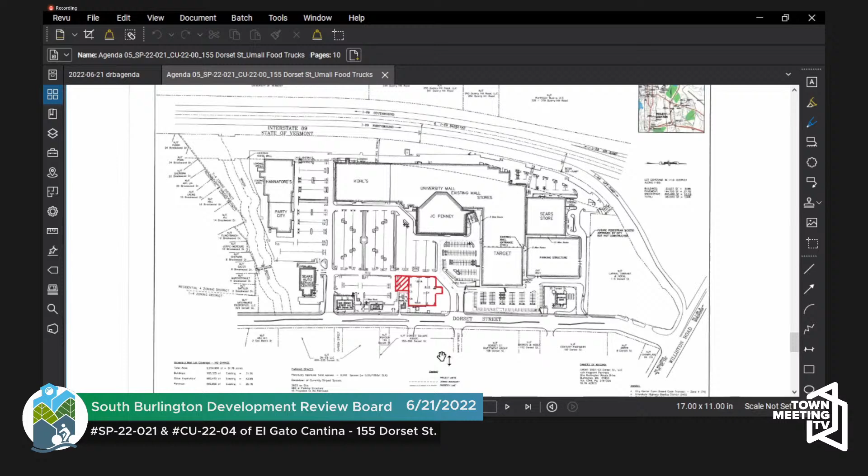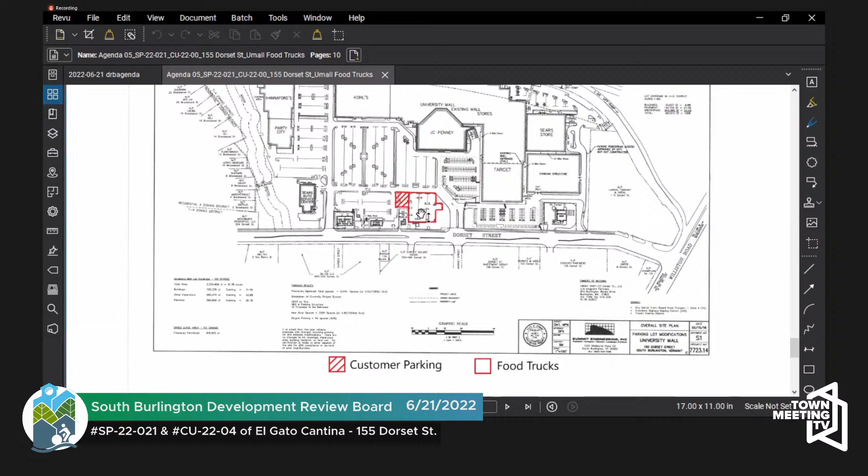Yeah, can you, or Delilah, whoever's running it, zoom in a little bit? Can you talk a little bit about how the food trucks are going to be configured? Are they going to go around like the edge so people gather in the middle? Right, so the food truck goes right where you have your mouse right now, on the other side. That's where the trucks will line up, and there are two parking lot mall light posts there, those little black things with lights.

I don't think the Christmas lights are going to do much, but the trucks will generally be around the perimeter. We'll put that condition in there - just keep an eye on it, don't overdo it, and get by with a minimum of what you need for safe operation. You don't want the lighting to become a nuisance or cause heavy glare for people driving by. Board members, any questions?

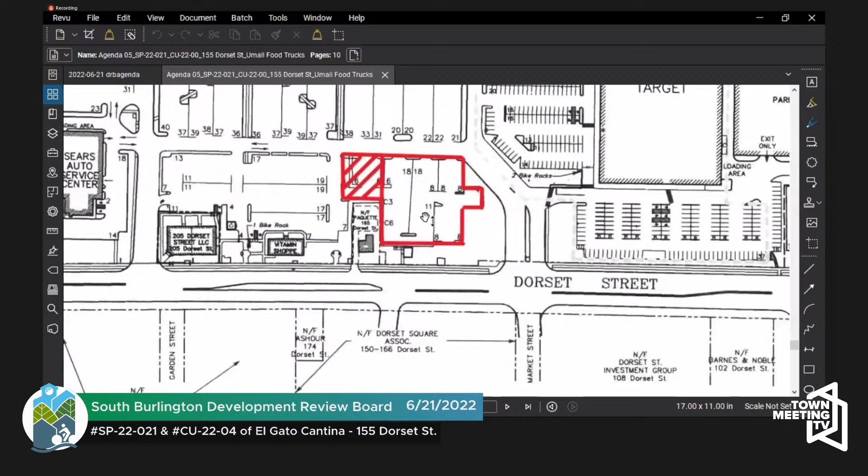Quick question - do the food trucks themselves have any lights for illumination around the area? Typically, yes, they do. They have lights by the service windows.

This is for conditional use, so will it be a seasonal permit, or is it approved in perpetuity if we approve it? The way it works is they get a conditional use approval from the board, and they're able to operate April through October. Then every year thereafter, they only need to come in and get a zoning permit to re-up it. With that, every year the zoning administrator checks in with PD and the fire department, and reviews our records for any complaints before the permit's issued. As long as they consistently get a zoning permit every year, they can continue the use April through October each subsequent year.

Do our regs have any limit on the number of trucks that can be there? We've shown the area of operation - this becomes part of the record, right? Yep, and there's a maximum of 16 seats, so as many trucks as they want to fit with a maximum of 16 seats. I think it'd be somewhat self-limiting.

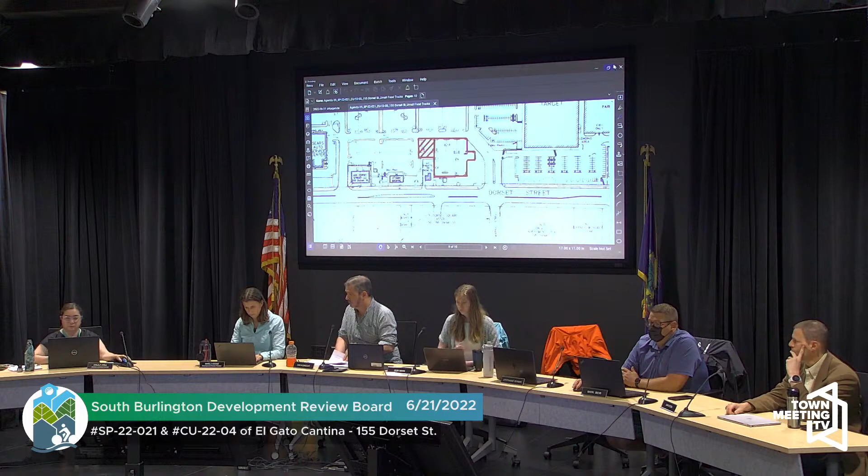Do we have anybody in the room here to testify other than the applicants? Anybody online? We'll close the hearing on this and then do a decision later, unless they have questions.

Do you guys have any more questions for us? We don't. Okay, so she'll take the conditions document here, add the part about the lighting, and then we'll issue a decision in the next few weeks.

I'll make a motion that we close site plan application SP 22021 and conditional use application CU 2204 for El Gato Cantina. I'll second the motion. Motion has been made and seconded. All those in favor of the motion, say aye. Aye. Passes 4-0. Thanks a lot, guys.

Thank you. All right, next item. Continued - ooh, we're ahead of schedule. Yep, 14 minutes ahead. That doesn't mean you guys get extra time.

We did clarify, just because it's on the agenda as 7:30, we're not in violation of open meeting law because we warned it for 7. The times didn't go on until we published the final agenda. Oh, that's pretty crafty. Yep, that's us, crafty. Whatever makes it move faster. Yeah, because we weren't going to be sitting here for 14 minutes not talking. That's right, exactly, okay.

Continued final plat application SD 2205, O'Brien Farm Road LLC, for the next phase of a previously approved master plan for up to 490 dwelling units and non-residential space as allowable in the zoning district. The phase consists of two 5-story multifamily residential buildings on lots 13 and 15, with a total of 251 dwelling units, 1,219 square feet of commercial space, and associated site improvements at 255 Kennedy Drive.

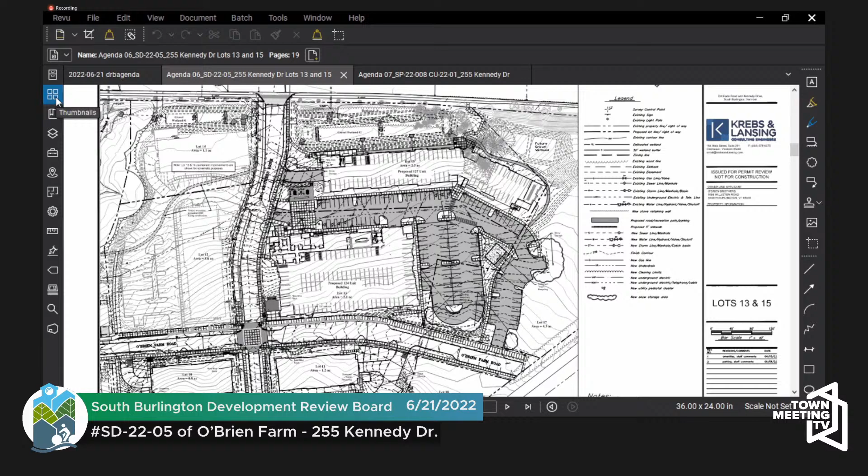All right, number 1, regarding PUD standards and 15.18.3 around access, circulation, and traffic management. Staff supports BFJ's recommendation, the outside consultant who reviews this, to include a condition requiring the signal be activated when 85% of the units approved for lots 10, 11, 13, and 15 reach occupancy. 85% of the total units would be 294 units, meaning the signal will be activated at occupancy of either the 3rd or 4th buildings. Staff recommends the board consider including a condition that the signal be activated at occupancy of the building containing the 294th unit in Hillside Phase 2, or sooner if warranted and demonstrated by a traffic study. Do you guys have any thoughts on that?

It seems in line with what we had proposed, so I think it works fine. We're planning on putting the signal in with building 13 and 15, so it sounds like it'll be activated before the 4th building is occupied. So that works for us. Okay great. Staff, any other further? Okay with you? Is that okay?

Do I have permission to go off script a little bit? You always, yes, whatever makes you question happy. Because you have approval for lots 10 and 11, right now what's your best guess in terms of timing of when 13, 15, 10, and 11 relate to one another? I think there's a lot in flux right now, and we get into that a little bit with the phasing request. Site logistics are challenging when we're talking the number of units that would all be constructed at once in 4 buildings. So it could be 2 years, it could be 3 years, and I think that's part of the phasing request.

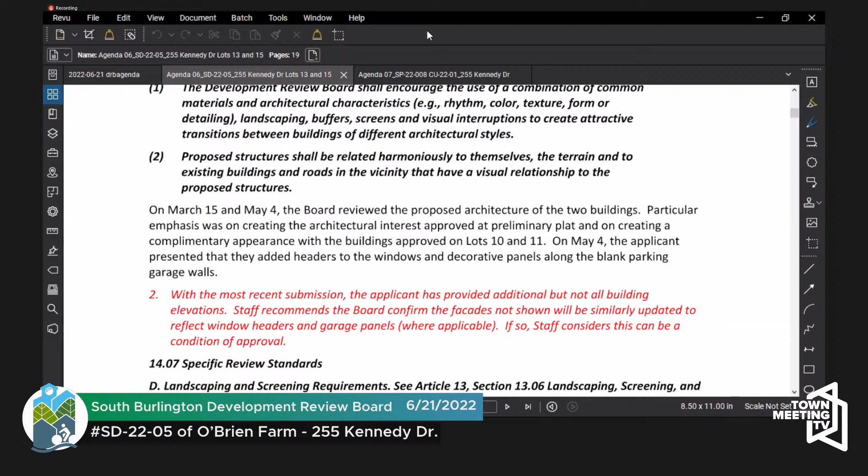Okay, move on to number 2 regarding elevations and architecture. So we've discussed in previous meetings the elevations of the building there. With the most recent submission, the applicant has provided additional but not all building elevations. Staff recommends the board confirm the facades not shown will be similarly updated to reflect window headers and garage panels where applicable. If so, staff considers this can be a condition of approval.

Where are you guys at on adding the extra? Yeah, so I think I read the comment, and we definitely can adapt all the elevations with the headers and the other details. I think the reason we did these 2 was because they were the only 2 we were proposing the garage level paneling on, because we wanted to get that out there. So certainly a condition of approval to update all the elevations to have the headers and all those details is fine.

All right, board members. Okay, great. Thanks. Moving right along, number 3 regarding landscaping and screening requirements.

So we talked quite a bit on the landscaping value and was it adequate? Is it meeting the minimum landscaping value? So the staff comment notes, excuse me, this was the finding of SD 2125.

The board finds the applicant may in the future be allowed credit for the remaining streetscape elements towards the required minimum landscaping budget on lots 12 to 15, as long as the objectives are otherwise met. The above elements are not typically required for streets, however the applicants propose these elements in support of their objective of creating a pedestrian-oriented development, which the board supports in exchange for reduced setbacks and increased heights. These values include only the incremental cost over standard features.

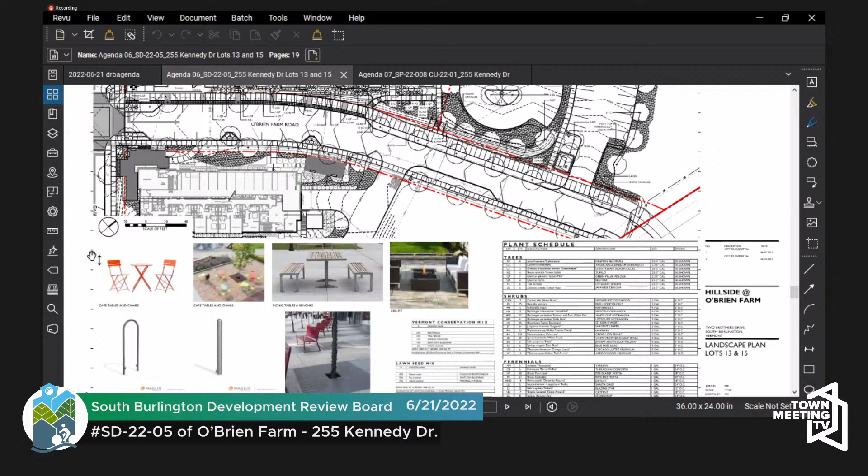The tree grate happens in the corner, just above the top of the page. If you scroll down a little bit, right? It's in that area, on the patio, I believe. Yeah.

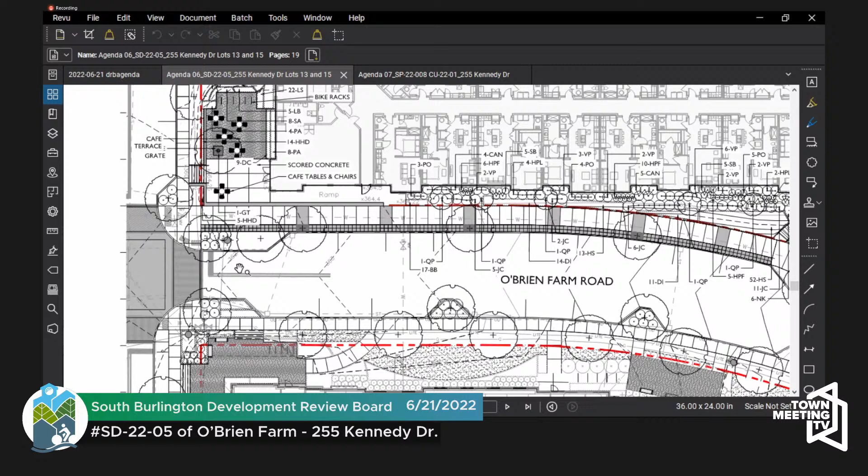There's trees and shrubs, perennials and grasses, and then the big discussion was about whether colored concrete and concrete pavers should be allowed. What they proposed is to include only the cost over the cost of standard concrete.

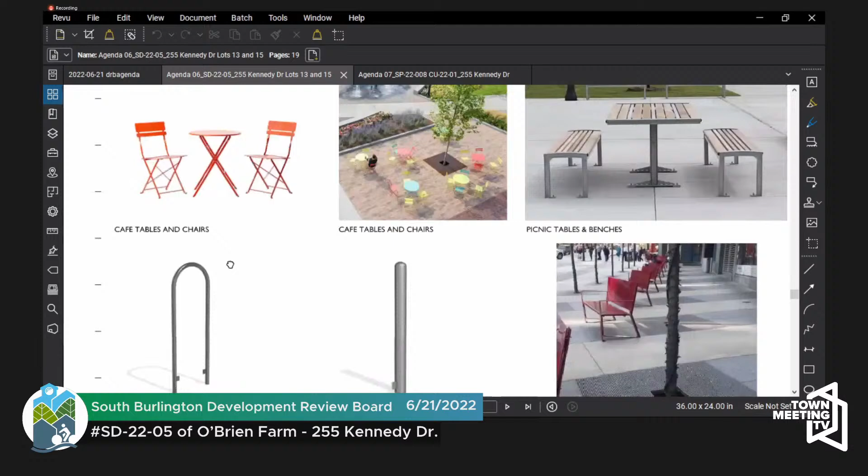We updated the budget after the last meeting to include the cost above standard concrete, like we discussed. I think we increased some tree sizes because that was requested. We made those changes and updated all the unit pricing to current market price for the trees.

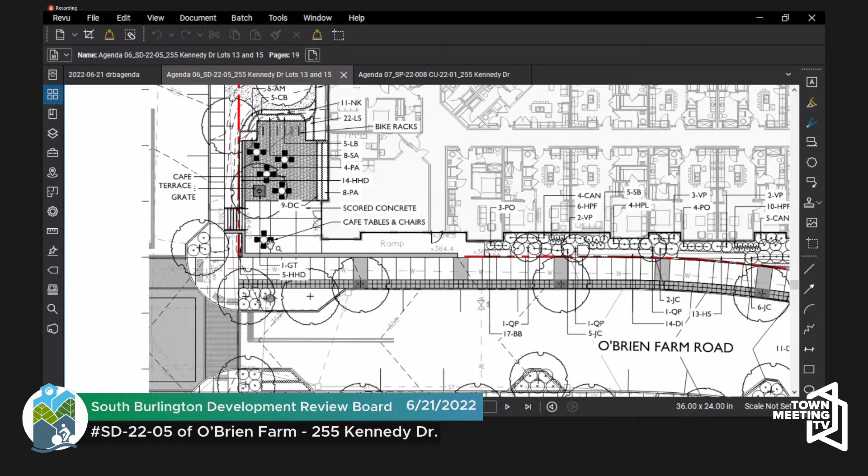We resubmitted the budget. I think this was my error on the bollards and bikes. One of the previous staff reports had a comment in the landscaping that said, with the exception of bike racks and bollards, these are non-permanent elements that are typically... and I read it and thought, oh, that means with the exception we can count those. But the rest of the sentence indicated they weren't typically counted.

So we had put them in because of that. If you guys are taking them out, it seems fine, and there's still enough budget in the previously approved permit to cover that deficit. So we would just increase the amount of that $140,000 being used to make up the difference, and pull those items out of the landscape budget, but still leave them in the project.

Board members? So I'm understanding that even once we take the bollards and bike racks out, the deficit is still more than adequate to make up the overage on the previous? The other way around, but yes—the overage on the previous is more than enough to make up the deficit on this one. I'm in agreement with it, and I affirm it because clearly the streetscape and these elements are all contributing to the success of this project. So I'm in support of this.

I'm curious about something for the record. How does our fire chief or somebody approve the location of the fire pits relative to a building or under a tree? You can't put it under a tree. The fire chief's position on fire pits is as long as they're 10 feet away from a structure, then you're fine.

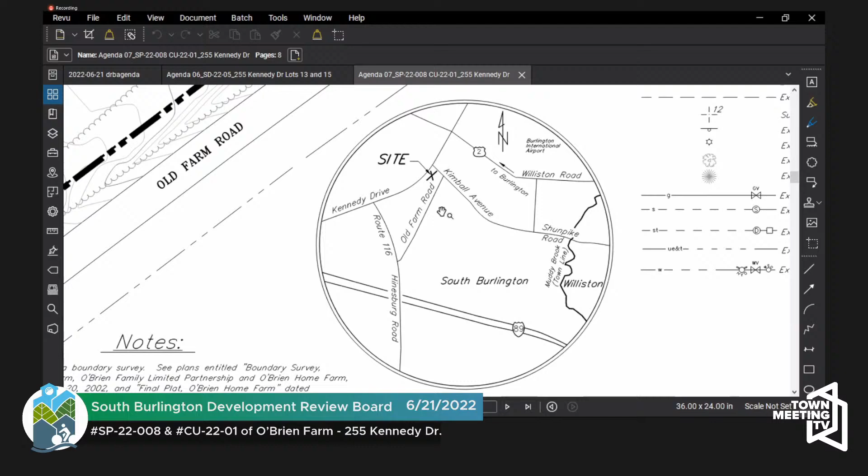We have a short little memo here. This is the parking that's associated with the lot 13-15 development. It's located on a different lot for purposes outlined in the project, essentially keeping the master plan borders intact and not expanding it to include more land. So we're putting the parking on a different lot. That lot is included in the adjacent master plan we've been working on with you guys. Everything seemed to be in order.

There was a bunch of discussion at the last hearing about the parking lot islands and whether to view it holistically or singularly. I think we settled that all out. There was a zoning line issue and some parking spaces that were in the wrong zoning district, in the R12 district, when parking is not an allowed use there. We did bring in the GIS zoning line, which we didn't have in the plans previously, and that made the situation much better, thankfully, not worse. It cleaned up the few spaces where the line was kind of half in the spaces. Those are all clearly in the C1LR now, and the 4 spaces we were discussing, we moved to an alternate location. So that's all cleaned up as well.

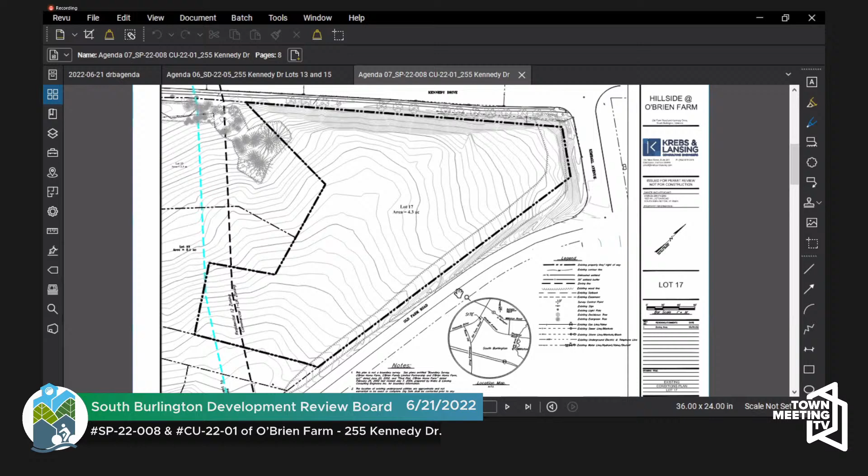Delilah, is there a plan that shows a little more where the parking actually is on the lot? The next sheet, I think. Just the next. Next shot. Okay, thanks, just so people can see it here.

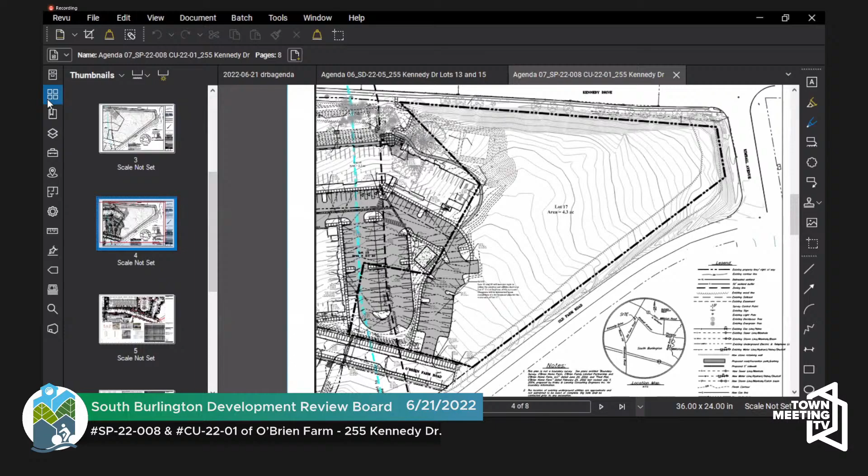Perfect. So the blue line there is the adjusted zoning district boundary, and before that, it cut off a few of the parking spaces in the island parking. Before that, there was parking where that triangle of the blue and black heavy line are, right to the left of the blue line, where that black line angled through, we took out. Yeah, previously the blue line was over in the middle spaces, and we talked about doing compact spaces or shifting the whole island over. We ended up not needing to do that because when we pulled in the GIS line, it was much more accurate and it all worked out. It's nice when that happens. Thankfully it didn't go the other way, that would have been a much bigger problem. Great.

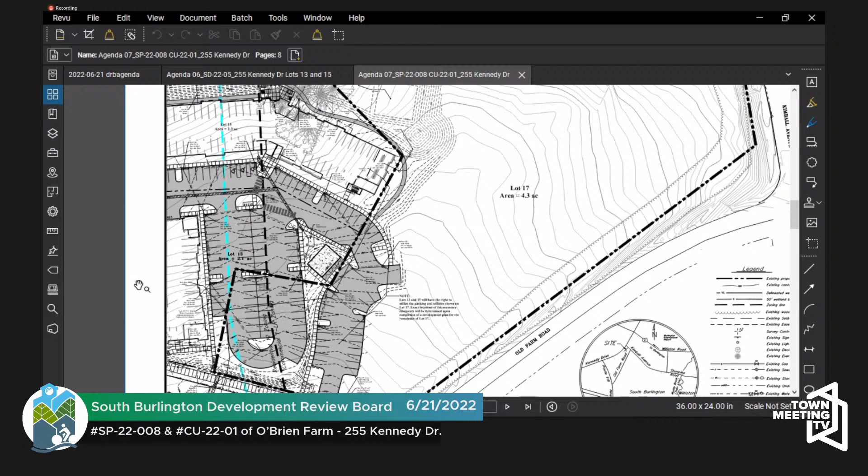Board members, any further questions on this item? No, I think that was the only open item from the last hearing. Staff, you satisfied? Yep. Any members of the public on this item to testify? Any members online or members of the public online?

Chair would entertain a motion on this one. I make a motion we close SP 22008 and conditional use CU 2201, 255 Kennedy Drive, 4.3 acre lot site plan and conditional use application. Motion's been made and seconded. All those in favor of the motion say aye. Aye. Motion carries 5-0. Thanks, guys. Thank you. Good luck.

Next item, site plan application SP-22-2004, Beta Air LLC, for a portion of the next phase of a previously approved 40.43 acre master plan for a 344,000 square foot manufacturing and office building, a 37,800 square foot office and retail building, a 15,600 square foot commercial building, and an 85,000 square foot flight instruction and airport use building. The project consists of a 24,000 square foot hangar, which represents a portion of the 85,000 square foot flight instruction and airport use building, at 430 Da Vinci Drive.

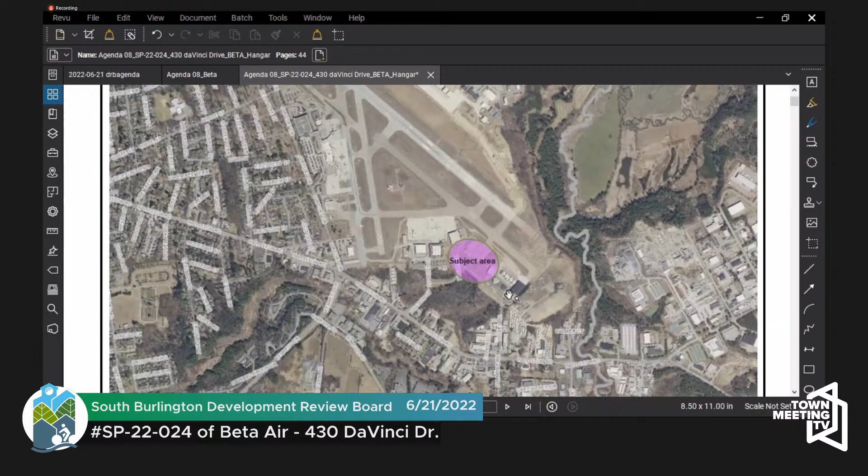All right, go ahead, guys. Well, you did a fantastic job in your summary there. We'll try to add a little color to that. This is the second project in the master plan that was previously approved. The first project was the assembly facility. This is the general aviation hangar, which is the first part of a multi-phase project that sits around the Valley West apron. For those that Googled it, there are usually some Air Guard planes parked there for a frame of reference. So we're excited to move forward on this project. As mentioned, this is part of our cultural center, part of our training facility, and we look forward to adding this building and this project to the campus.

Okay, all right, I'm going to dive into the staff comments. First one. It's on. Where's that, middle of page? Page number here, I can't see the color. It's page, must be page 3. Yes, page 3, okay.

So the connection between the project area and the portion of Valley Road to remain in the blue phase shall be removed no later than the red phase. Right now we're looking at the subject heading here, master plan conditions. These are conditions in the master plan that apply to all projects within the master plan area. So one of the conditions was that the connection between Valley Road and the project be removed no later than the red phase. And so that's the context.

Sorry, and you feel it's not relevant because of this condition? Okay, right, because we'll only get to it later. Gotcha. All right, so we can remove it. We want to just be sure that everybody concurs with the staff. Concur? Yep, okay, all right. Thanks. Applicant, is that okay with you? It is, thank you. All right, thanks, next item is middle of page, top of page 6.

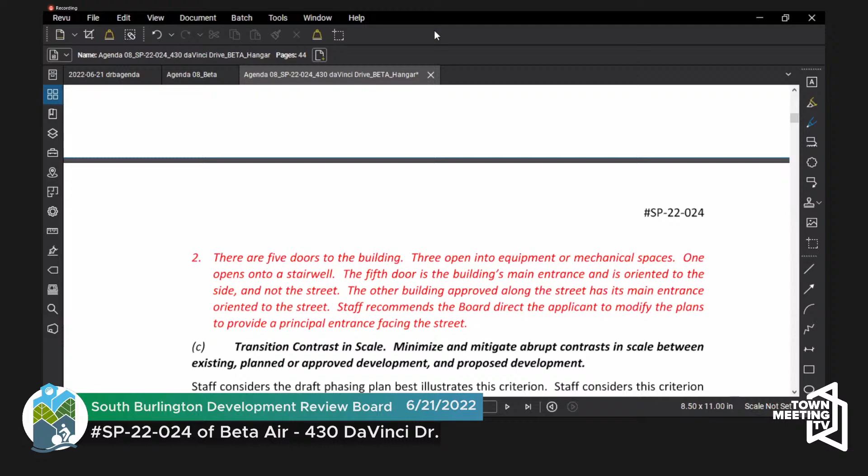Applicants? Appreciate the comment. As we discussed, this is the first phase of a multi-phase project. The main entrance, the cultural center, which will be built as part of the second phase, is where that street-facing entrance would be. The hangar itself is a service building. The entrance is off to the side, although because it's an odd configuration—not quite a corner lot, but maybe a corner lot—you could make the argument that it is on the street-facing side if you chose Eagle Drive as the orientation.

In 14.06, it doesn't actually require the door to be on the front of the street. It just requires that there is a clear pathway from the street to the entranceway, which we feel the landscape plan articulates really well, showing how all those spaces come together for the public. We would ask that the DRB approve the plan as submitted.

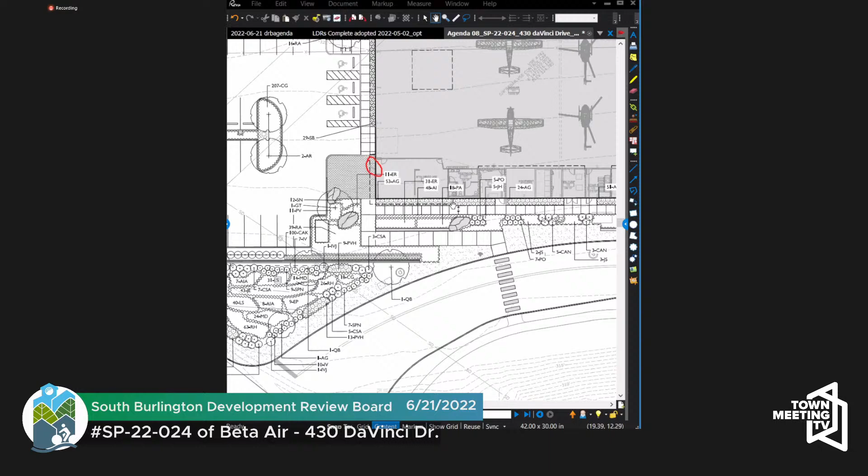And the street in question is the new drive, Da Vinci Drive, at the bottom of the page there. You can see the sidewalk and the crosswalk provided that will guide pedestrians to the temporary front of the building. There's also a sidewalk that runs across the front, which will eventually connect to the future primary entrance. Then there's the site amenity, where the rocks and the hardscape are.

Wait, the second half of pavers—where's the second half of the building going to be? To the right. It's off the page to the right, as I'm looking at it. Okay, there, Dan.

Is this building open to the public, or is it purely employee staff? Closed. I would say it's probably 90% beta, 10% public. We'll have people coming there, but it's not intended to be the public component of the cultural center. That's the piece that's yet to be designed, yet to be built.

There's another door that will be facing the street further to the right that we don't see on this picture. That hasn't been designed yet. It's not part of this application. It's a future application, correct?

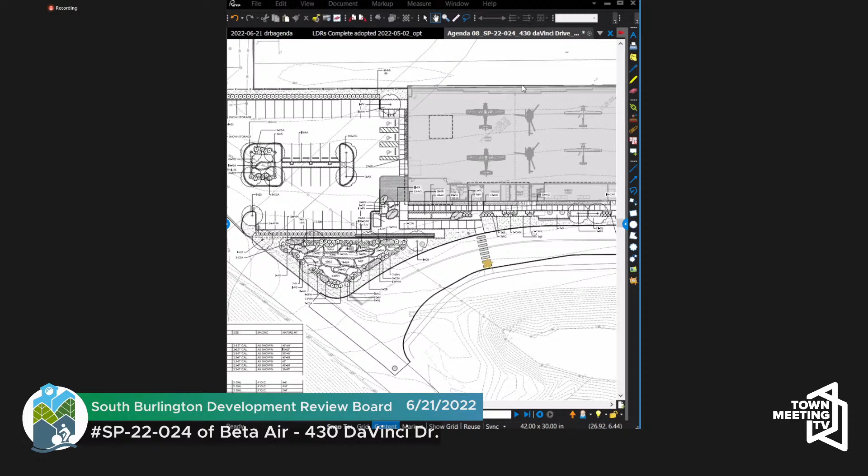When the cultural center gets built and has a main prominent public entrance, will the other entrances currently on the hangar still be used for public, or will they be overridden by the main entrance? They'll be subordinate to the primary entrance. There may be one or two people from time to time that need to use that, but it goes from 90% beta to 99% beta once that new public entrance exists.

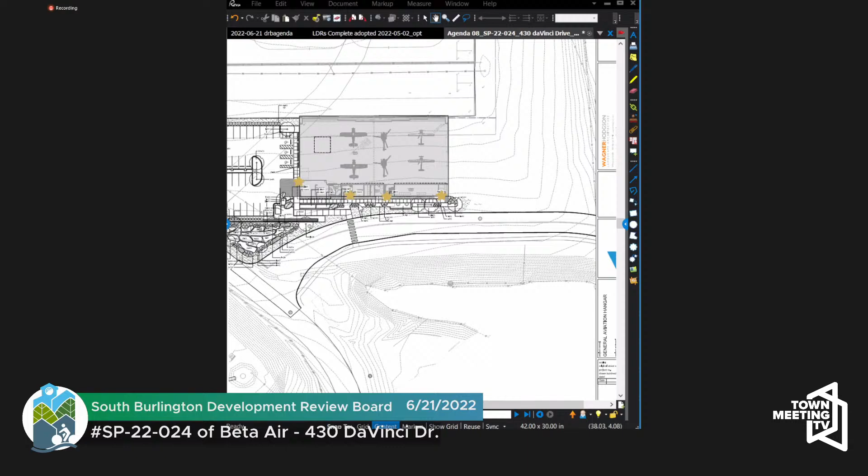I don't want to say that there's no public going to come through there, but it'll be rare, since it's not the primary means. I tried to put little stars on all the doors, but I'm missing one at this scale.

So I'm going to zoom in to this area. The suggestion here was that this is again the main door, and this space is sort of open, so the suggestion was that there should be a second door, or maybe just a corner door. The door looks internal to the building, but... oh, there it is.

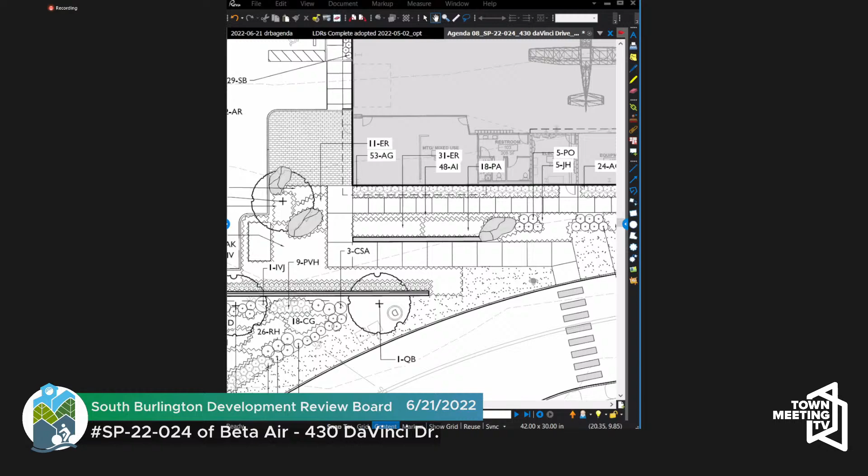So what's the standard say? I know what the standard says, but then this is a corner lot, is it? It's got two streets. Yeah, they're both private streets, and we've interpreted Eagle Drive to not be really a street at all for the purposes of this application, because otherwise you'd have a bunch of parking to the front, and that doesn't work.

Actually, the parking to the front is about public streets, so that doesn't matter anyway. But yeah, we've interpreted this to be the principal street because that's sort of the street through the project, and we would agree with that. Ultimately, when the cultural center is built out, that's the intent. The standard we're applying is 1406A.

And if you look at the new insert right below the heading 14.06, do it in a way that's creative, inventive, and innovative so that there's a good experience as you're moving from place to place in that area, which is what's shown in the landscape plan.

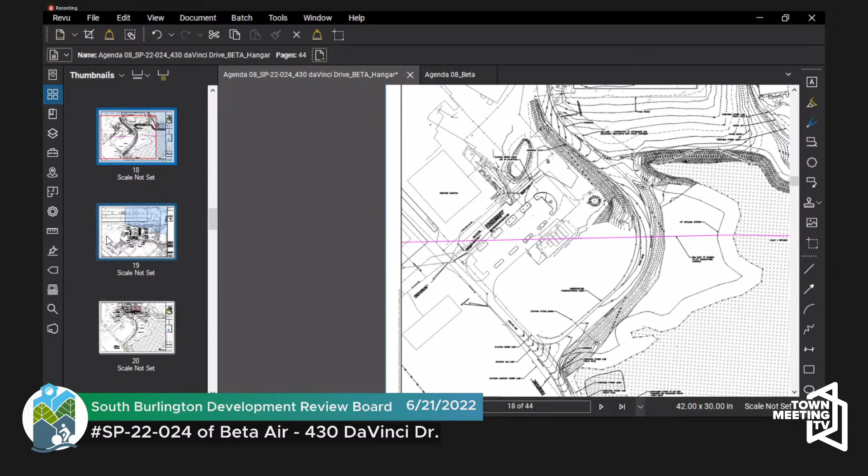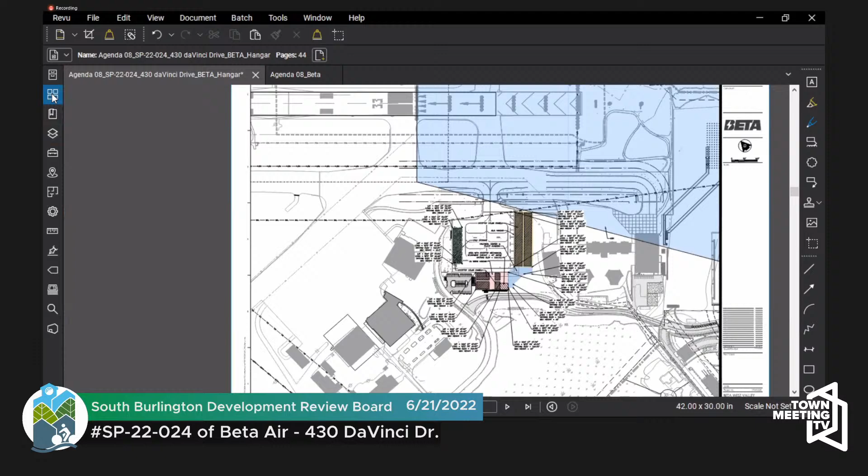So because the other building approved along the street has its main entrance door into the street, that's somewhat driving your recommendation. Somewhat, and the general principle of having entrances face the street. The city's objective through the conglomeration of all the standards, the thread that runs through them, is that doors should face the street and we should move in that direction, though it has stopped short of requiring it.

Which seems reasonable given the standard the city has added in 14.06 about creativity, invention, and innovation, in that a primary entrance doesn't need to be fixed, especially in this situation where there's no pattern yet, because the other building is 1,000 or 1,200 feet away where the assembly facility is. There's an opportunity to create a variety of entrance types and experiences for the public moving in and out of this new private drive that we're creating.

Board members, dive in on this. I've got a couple of questions.

So you park in the parking lot and then walk over to the side doors. If you could bring that up, so you see where the paved area is, the area highlighted with pavers, that's the entry plaza. You'll walk from your car to the entry plaza, and the door sits right off the entry plaza, entering the building at that location. The walkway over to the right, there's another entrance above the walkway—those are emergency exits, and for now that walkway serves the function of emergency egress.

Thank you. Yeah, jump in here—can you turn your mic on? It's helpful to think of this building as a composition, and that corner entry is a full glass, wrapped corner. The way the entry door is oriented coordinates you directly with the parking lot. As the building expands into the next phase, that connecting sidewalk will remain a secondary sidewalk, because ultimately there will be a parking garage related to the second phase. So this parking area will primarily focus on the GA hangar, not the full build. Right now the building is oriented to really use that parking lot—there probably won't be a lot of pedestrians accessing that way until the full cultural center is built.

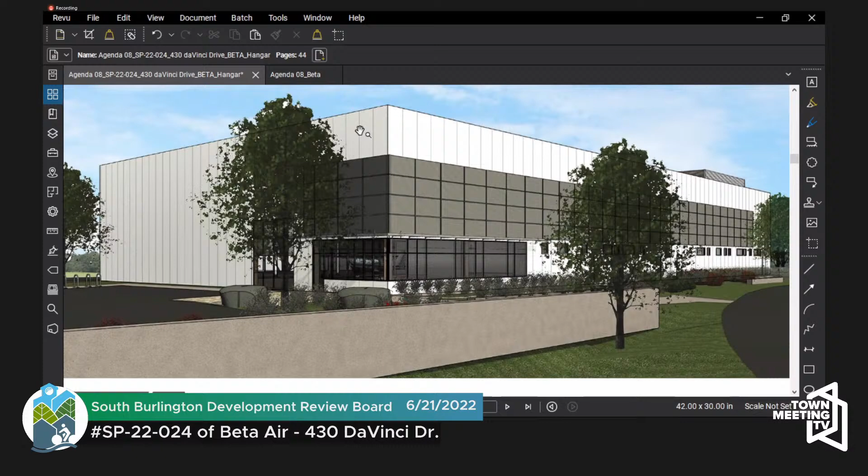It's helpful, at least for me, to look at the issue this way: while there's more flexibility in this rewrite, more guidance given to the board, we do have pedestrian orientation standard D—improve and enhance pedestrian connections and walkability within the area proposed for development. So when I look at the entrance there—well, if I wanted to be a bomb thrower, I'd say this is all oriented about car culture. The entrance is for people who drive cars; the rest of you walking and biking aren't being served or welcomed. And the standard is pretty clear about enhancing pedestrian connections.

It may seem weird in this context, given it's 95% right here, but we had this whole discussion with a previous applicant about a car dealership on Shelburne Road regarding the main entrance—it's very rare that somebody's walking down Shelburne Road to buy a car. Most everybody's driving, or a friend already has a car, but it's clear we're trying to reorient things toward pedestrians and the whole community, not just those with cars. So staff comment number three, related to the prior one, is that staff considers the building will be pedestrian oriented.

So Quinn, you got something on this? Yeah, I was just going to add that we appreciate you talking through this—we're digesting this new standard, and just to share with the board what I'm thinking: I'm a little torn because I do see the leeway the applicant is noting as far as how the standard is written. Marla, I appreciate your overview as far as the intention—that's helpful.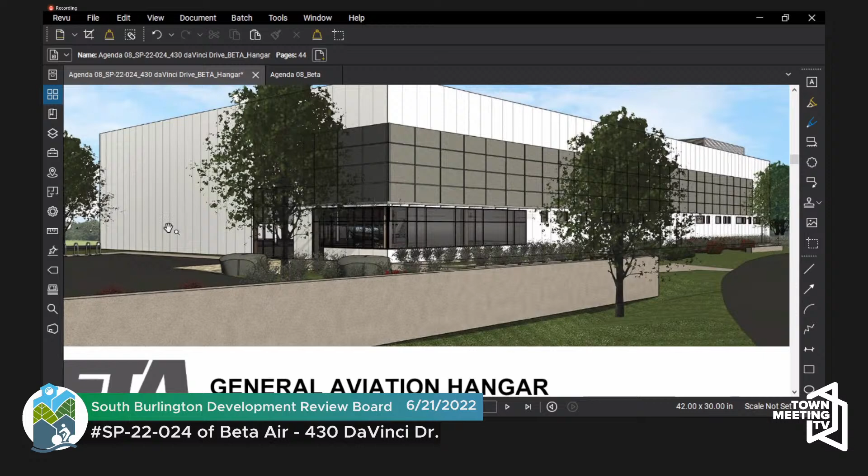I think in regards to solving the amenity space, I like the direction we're going in, I think that could be solved. And for me, the public door isn't as important because the public space is more important for me if phase 2 never gets built, because you got to look at these things as standalone projects, and this building's not meant to be like a public building. So if it doesn't have a public front door facing the street, it doesn't bother me so much.

Because if phase 2 gets built, which I say if, because we can't control what the future holds, if it gets built it's going to have its own amenity space, but this building's already going to have it, and it will have the main entrance into both of these buildings. If it never gets built, this building is never meant to be like a public building per se. So your testimony that it's going to be a locked, secure door speaks a lot to me, because if you had a public door on the front, people would be going to it and it's secure.

You can't go into it short of getting buzzed in, but I think routing them to the side. So if our regulations do allow us that flexibility for this to be a discretion item, I would be leaning towards, in this instance, we allow it to move forward as designed, because of the phasing, and the fact that if it stands alone, it's not meant to be a public building.

And we're not closing the hearing on this one. We're going to probably work on it some more. Yeah, it sounds like we're going to work a little bit on the landscaping, but I'd love to have it be something we can turn around. I just don't want to get bogged down, because we need time to digest this. The plan is we'll talk about it in more deliberations, and then provide that feedback to you at the meeting in which you provide the feedback on the site amenity to us.

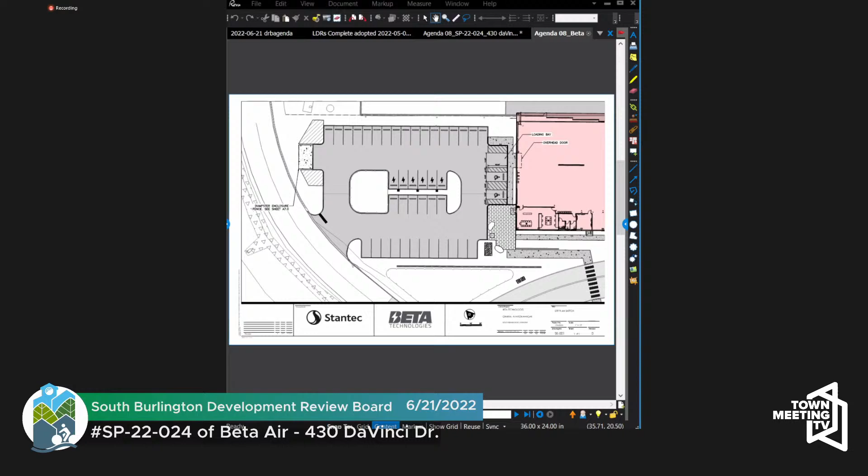So the loading dock is now here, where it was here? Correct. And you've kept the same number of parking spaces? We will actually lose one. And is it an ADA or a regular space? It will lose one ADA space, and we were over parked on the ADA, so we're still compliant. All right, board members okay with that? All right, staff, we got it on the screen, awesome.

Number 7, bike parking and storage. Since the long-term spaces are not within the secure area, staff recommends the board require demonstration that the long-term parking allows secure locking of the frame and wheel and supports a bicycle upright, through provision of a detail of the planned bicycle parking rack. Staff further recommends the board require the applicant provide a closed locker and show its location on the architectural plans.

Did we get a new submittal on that? And that's the sketch right there. The plan in the lower left-hand corner has two note callouts, one for the location of the bike racks, right along column line E. And then on the bottom of the page, you can see where the lockers are noted as well. There's also a supplemental sketch, more of a cut sheet, that was provided for the type of bike racks we're using, showing how they're being secured and how they're able to be locked.

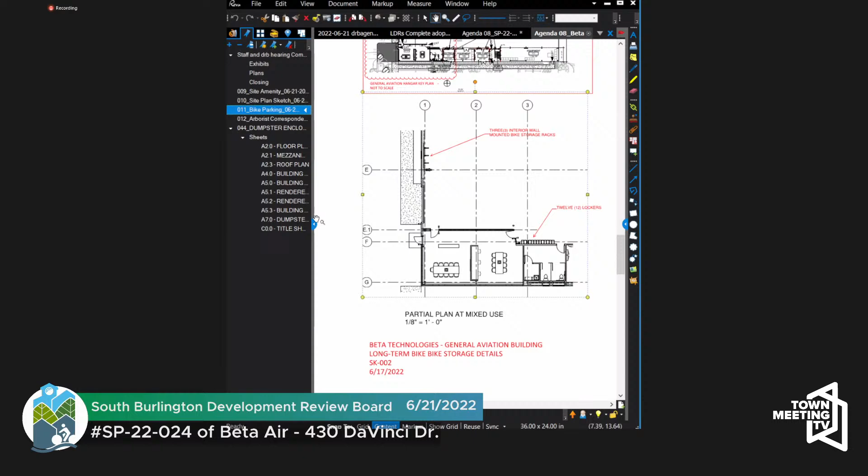So all that information is in the package that was submitted earlier today. Is staff satisfied on that? I'm going to have to take their word for it on the cut sheet. It was in the write-up, Marla, the supplemental narrative. Got it. Because it's not like a detail, it's just a spec sheet. Okay, thanks, guys.

Staff comment number 8 regarding top of page 13: Trees shall have a caliper equal to or greater than 2.5 inches when measured on the tree stem 6 inches above the root ball. Staff comment: trees are proposed to be 2.5 to 3 inches in caliper, except for the autumn brilliance service berry, which is proposed to be 2.25 inches, of which 4 are proposed. Sneaky service berries there. Staff recommends the board require the applicant to increase the installed size of this tree species.

Who wants to take the service berry question? We have Jeff and Carolyn who talked to the arborist. The arborist agreed, and there's email correspondence included in the package earlier today, accepting the 2 to 2.5 inch caliper tree, pending the DRB's approval. Carolyn: to further explain, they're not shade trees, they're ornamental trees meant to highlight the stormwater area. They're not providing shade on the parking lot, and they're not street trees. We typically size them a little smaller than something that's going to get 60 to 80 feet. They only get about 20, 25 feet tall.

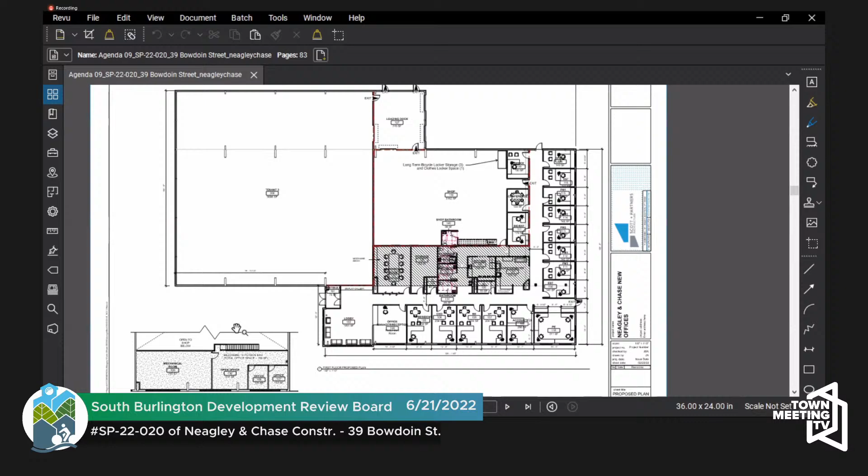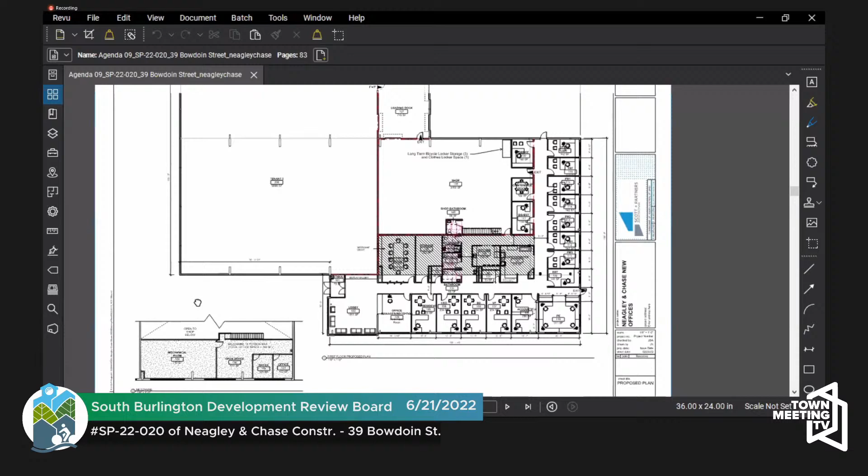Marla, I had the same problem. So Mark indicated that he would be very happy, when his strength resumes, to be able to provide better responses on certain items associated with the architecture of the building. But unfortunately, there will be a number of them that will be blank tonight for us. All right.

I'm going to propose that we go through this, knowing we'll have more discussion. Let's try to get through as many of the staff comments as we can without too much detail, knowing we can answer more later. Does that sound okay to staff?

Do we know which ones are the high level ones you want to talk about? Looking at the staff comments, they're pretty colorful, so I'm wondering which ones we want to highlight for tonight. Expect nothing less from Marla. I'll let Dave drive the train on that. I get to be an engineer in a different way.

All right, choo-choo. So there's probably two of them. One of the staff reports talks about how the board should look at this particular building, how it orients itself to the street, whether it's set up in a way that complies with the LDRs. I think that's probably one of the primary components.

The secondary aspect is the proposed means of access on the east side of the site. Being a corner lot, it's challenged having frontage on two streets, but there is a recommendation to align a driveway. This got vetted back in 2019 when nearly this exact same site plan came before the board. Let's open up discussion on how this building orients itself to the street and whether that makes sense.

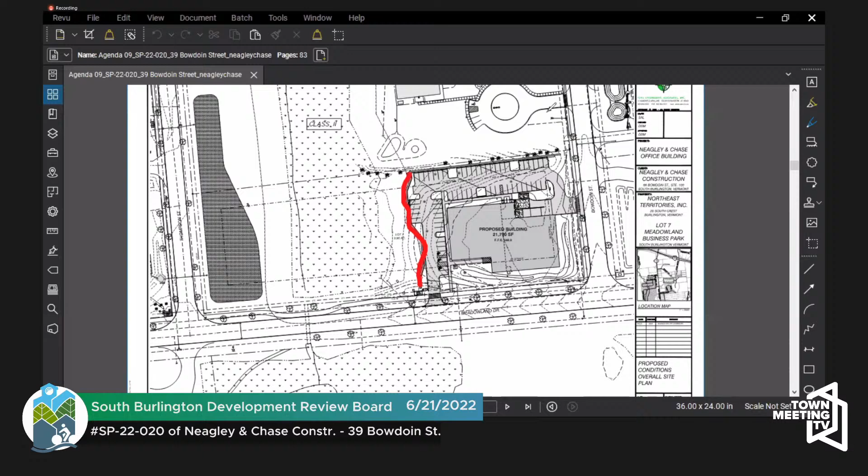What's highlighted on screen now is the retaining wall on the west side. I think the biggest discussion point we had back in 2019 was perhaps how to augment or break up the mass of that wall with landscaping. That's perhaps one mitigation measure to propose so this doesn't look like an island out in the middle of the industrial park.

Just to give context, this is the big picture plan. If we go one sheet further into the package, it will start to zoom in on the building and the amenities around it—there was a perimeter question about staff comment number 2, which is about the facade.

So the architectural plans may be in the very back of the set, as far as at least the three sheets that were provided. So this particular sheet, while Marla is looking for the architecturals, what we are proposing is two entry points.

This is consistent with the OnLogic building that sits on a corner parcel a little further west in this business park. Mark Neagley wanted to make sure everybody understood that as you drive down Meadowland Drive, you have this long bowling alley aesthetic, and that's where they wanted to invest in the character of that particular entrance on the southwest corner of the building. That's also the area that's another discussion point as far as the site amenity, to pull it all together in a comprehensive aesthetic and improvement area.

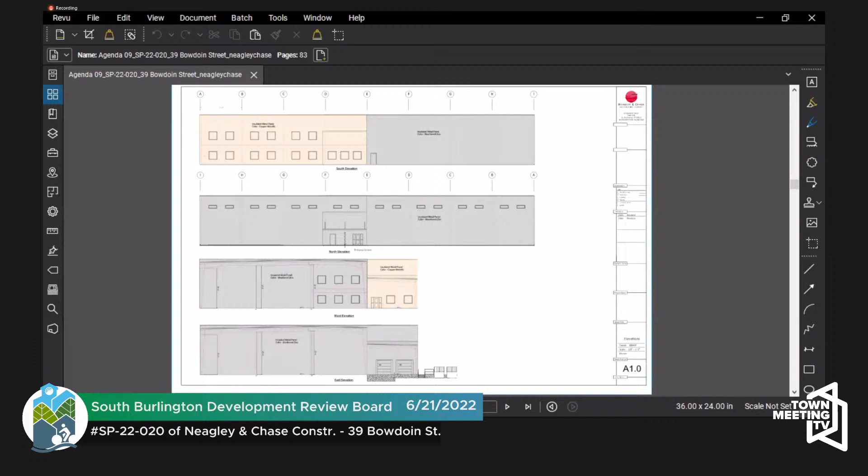A shoebox. So the second one from the bottom is essentially the view as you're heading east on Meadowland Drive, coming from Hinesburg Road, heading down toward this particular property. These are the punch-out windows associated with some of the office component, but on the right-hand side is the common entrance, and that's ultimately going to be the area that I'd like to think will be dressed up pretty significantly, so it represents a drawing point for the eye as well as a signal as far as where people are to enter this building.

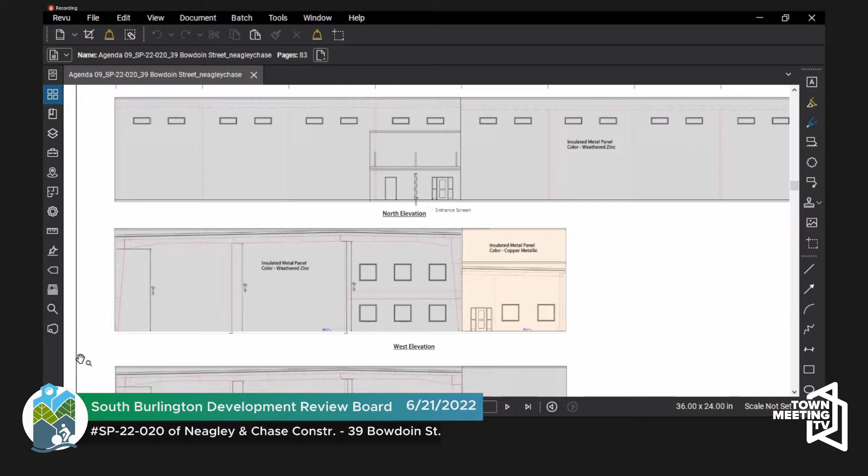So that is still an item that needs additional detail in order to get us closer to where we need to be in regards to describing how this particular layout works.

And most of the employees would come in on that north side, right? Because that west side you just showed didn't seem to have a door there. There's some parking spaces there. That is correct. There are entry points on the northeast end of the building to facilitate ease of access.

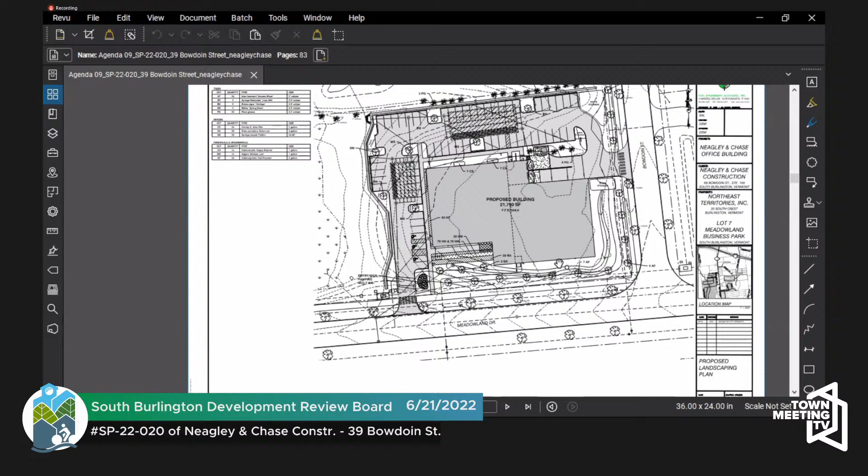Is there an entrance on the east side? It's kind of back to the previous debate about orienting an entrance to the street. The east side of the building, does it have one? It's basically that north side is the entrance. So this is the west side entrance that you were seeing on that elevation.

The elevation shows that the siding on this side is sort of a copper color, and then I don't know if it was like a light blue or white on this side. And then there is not a main door on the east side. We don't really have any kind of door facing either street at this point.

That is correct. And so this is where that standard about being consistent with the remainder of the development comes more into play, because this is a much more established neighborhood with a pattern of development that already exists.

Right, and what is that pattern on adjoining lots? Do we know that? Do they all have doors facing the street? I didn't look specifically at the doors when writing the staff report, but I did look at the architecture.

And I would say that the nicest building you can see from Meadowland Drive is actually the existing Neagley and Chase building, which has some brick on the first couple levels visible from the street. This building is sort of in between that one and the plain metal siding ones. The SuperTemp one, you mean? Or the condos? I guess it's the condos, the 5,000 square foot segmented ones, the long linear building.

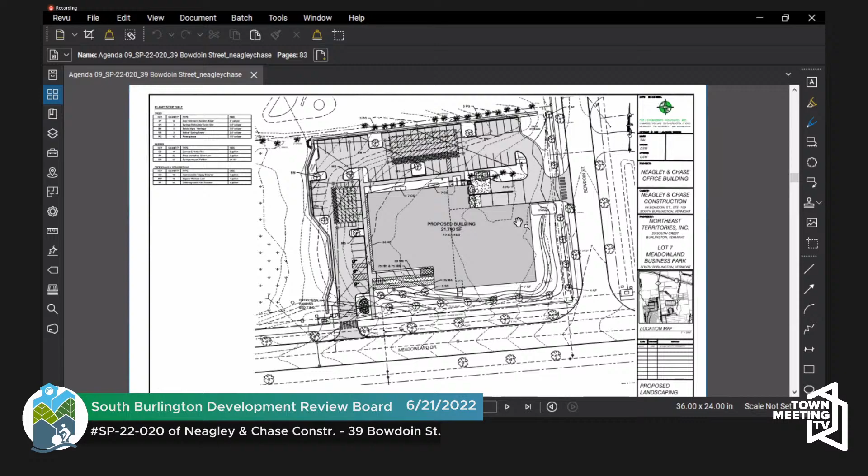The CBA building's been there forever. It was the first one down there before the Rock, before OnLogic, before Super Temp. It was the first building. Tom Chase did that.

The comment here was—oops, I should not be looking at my own screen, I should be marking on your screen. Going to highlighter.

Whether the driveway on the east should be aligned to the driveway on the west. The pink highlighting represents an initial design—back in 2019, that's exactly what we did. We essentially had two curb cuts, one that came out opposite of the CBA driveway, that's what you're seeing in the top right, near the north arrow. And then we have this loading dock that, just because of the geometrics of moving a truck in and out, we couldn't figure out how to utilize a driveway across from CBA and still get into this particular building. So that was at least the background.

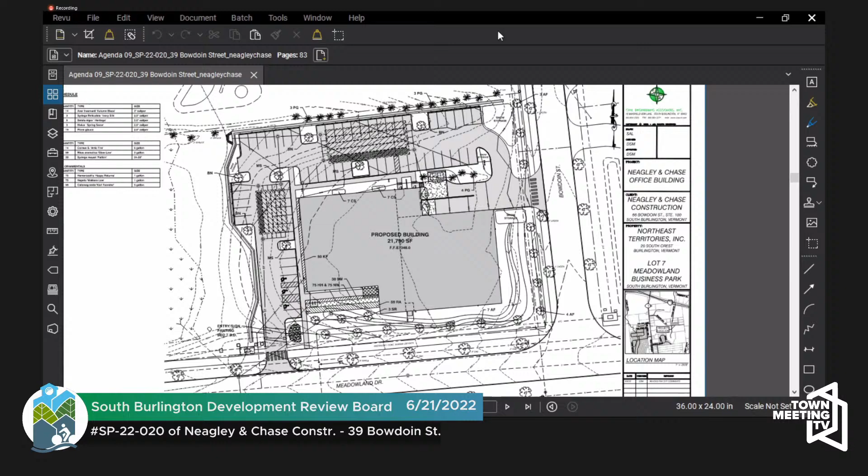What we were asked to do back in 2019 was actually to consolidate it into one driveway. In this particular case, the one that was chosen enables the trucks to access the loading dock. The reason we did that was because of the dead-end nature of Meadowland Drive, everybody is coming in and leaving towards the west. So most of this particular traffic is likely going to be utilizing that driveway off of Meadowland Drive, and we felt that the limited amount of people parked in the far northeast corner would create a very small amount of conflict with those coming out of the CBA driveway.

Because that's really what you're trying to do when you align driveways—if it's a street, you want ease of movement back and forth. If it's private driveways, which essentially these are, you want to make sure people can see each other so that when they're making turning movements, they're not turning into each other. So that's really the technical issue regarding how those driveways interact with the neighboring area.

Do the standards require orientation with the other? Was there flexibility? Because I see the point about the loading docks. Let me get the exact standard, because I think in certain circumstances it's specifically required, and in other circumstances it's recommended. So that is... jumping around a lot here.

Do we know what staff comment this is? I don't know, tell me what staff comment it is. 14E. So, 15A, 14E, which is within the street design requirements—15A, 14E, access and circulation.

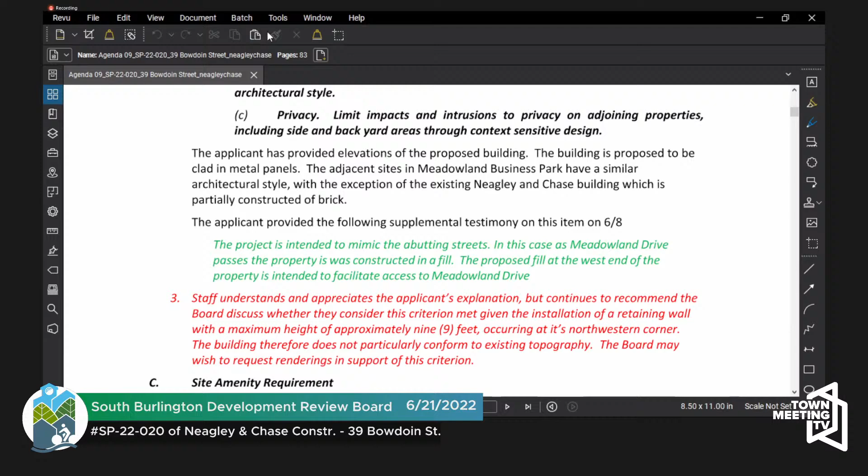In my opinion, it kind of is what it is in terms of an industrial development lot, but at the same time it might not be a bad idea to incorporate it. Not a 3D rendering, but I think if you incorporate it into the west elevation of the building, show the retaining wall, the grade and the retaining wall, then the building above it, so we have some perspective for height purposes.

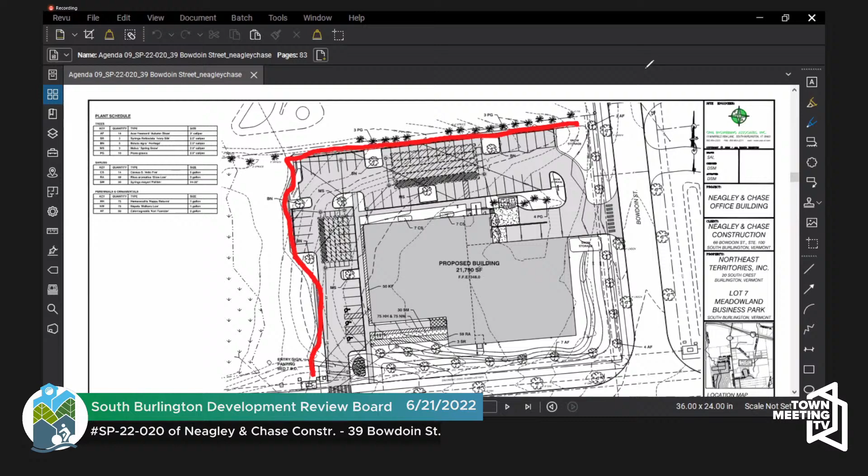Yeah, I think that would be good, just to make sure. Are there any safety concerns at that height? I'm sure that's got to be fenced.

Anytime you have a pedestrian adjacent to a drop of more than 30 inches, you're required to basically provide some level of protection. As you get further away from that issue, it becomes more a liability issue for your insurance company as far as what protections you want to provide there.

So there's going to be a fence on top of the retaining wall? No, there should be at least a 42-inch high guardrail. Guardrail, okay. Gotcha. 42 is pretty big though. That's not 42 like inch? That's not the kind of guardrail you're picturing on the highway.

That's more like a pedestrian guardrail, like what you'd see on a bridge. No more than 4-inch spacing for the opening, pretty serious. Basically it's like what you'd see as a residential picket porch fence, but 42 inches high.

And can the rendering show that too? Yes, probably good, because we'll cross that bridge when we come to it. The other thing I want to talk about is the site amenity. I'm just going to write down what you just said - should show fence.

Okay, so the site amenity is staff comment number 4. We just talked about this with Beta. This is the board's first hearing where they're talking about site amenities at all, so please be patient with us.

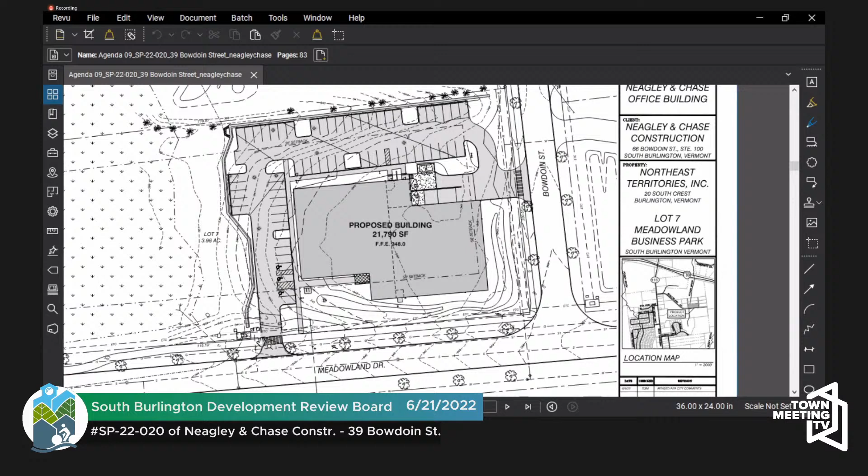It's 8 feet wide, not the 10 feet that we do today, but nonetheless it does get used a lot for people walking during lunchtime and things of that nature. As you head in the northerly direction, out to the GBT building, it's actually a 5-foot asphalt sidewalk.

I don't know the history of that. In the northerly direction, unfortunately today there is no connectivity to that particular feature. There is an easement in favor of the city running in the east-west direction that takes you all the way from Hinesburg Road down to points in the northeast of the Meadowland Business Park.

That was actually not part of this project. It was part of a Dynapower subdivision. So there's at least easements in place, but there's no infrastructure that basically allows people to go in the northerly direction and complete their loop. So most of the traffic we're seeing, at least on the pedestrian end, is moving in the westerly direction. So we felt the existing conditions were good for that situation.

That's perfect. So you've got the recreation path on the left that heads in the westerly direction, and you've got the sidewalk that essentially services... am I allowed to use who the tenant is? We'll call it GPT Properties. Their building is the one serviced by that particular sidewalk, as well as anybody on the opposite side of the street.

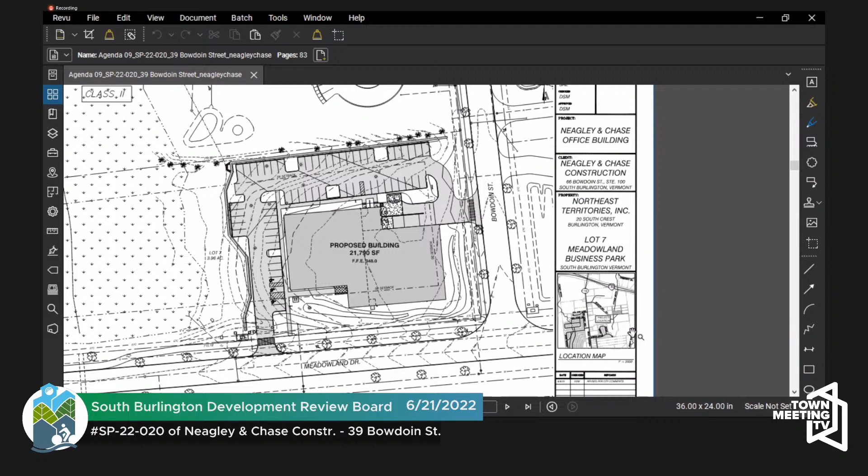Okay, number 9 was the stormwater comments, or water, sorry. Number 10 was the easement document. Is that something you were able to work on? Okay, we will do that.

Number 11, page 12, turning movement information. We promised that we would include that with the other turning movement studies in order to create a full package of turning movements through that area, through the entire property.

And then comment number 12 regarding the bike racks. I don't think that's a major issue. We will find a way to satisfy the needs on both sides of the building.

Number 16, landscaping budget. And right there in the middle of page 16, staff supports the inclusion of some perennials, grasses, and entry sign planting, but as noted above, recommends the board require the applicant to improve plantings in the front yard along Meadowland Drive, even if it means a small reduction in the number of perennials.

So, all right, you'll be working with the landscape. I think that ultimately becomes the whole package along that particular side of the building. And staff did ask the applicant to confirm the estimate, and Mark Neagley did confirm that is the number they're working with right now, despite the COVID craziness, that it is what it is.